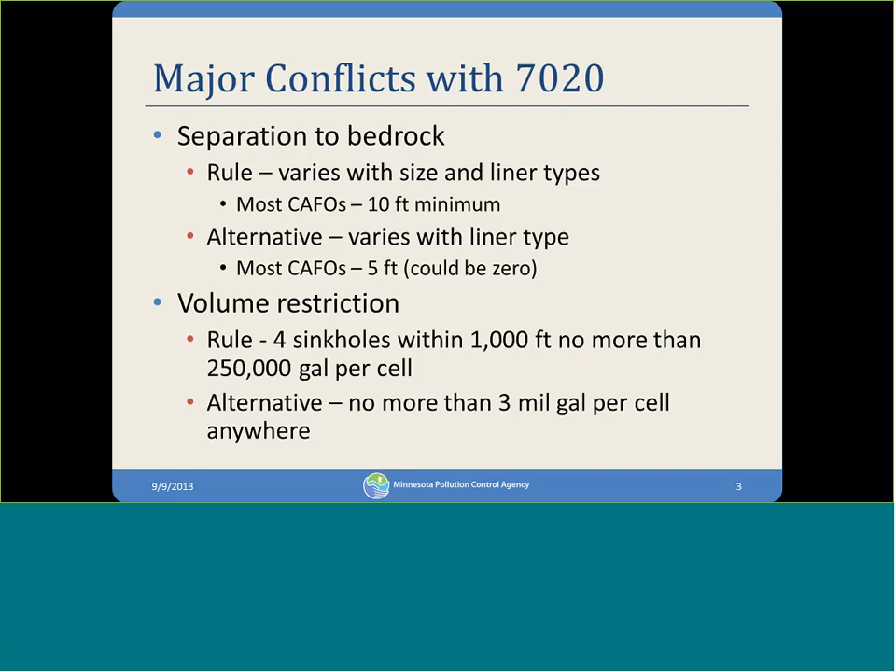So up until this point, how have we implemented the alternative standards? Well, like I said, this is the first time MPCA has been asked to act on them specifically, but I believe some counties have been asked to act on the alternative standards already. In 2001, in response to the work group standards, the MPCA commissioner at the time drafted a letter to the legislature saying that we can allow alternatives to our rules via the SDS permit, provided the alternatives provide equivalent protection of the environment.

So what we interpreted that to mean is staff assumed that the alternative standards could be allowed through an SDS permit, and in some cases even without a permit, if they're equivalent to the rule. In our rule revision process we're undergoing right now, we thought about cleaning up the rule, and this discussion came up with one of the Attorney General's office staff about these alternative standards and their reservation with us implementing the alternative standards that were not in rule.

And this SONAR says that you cannot vary things like setback distances, shoreland, floodplain, proximity to sinkholes, and separation distance to bedrock via the SDS permit. So it's very clear that, no, we can't implement the alternative standard fully when there's a major conflict with some locational restrictions. And two of the big ones here were proximity to sinkholes and separation distance to bedrock.

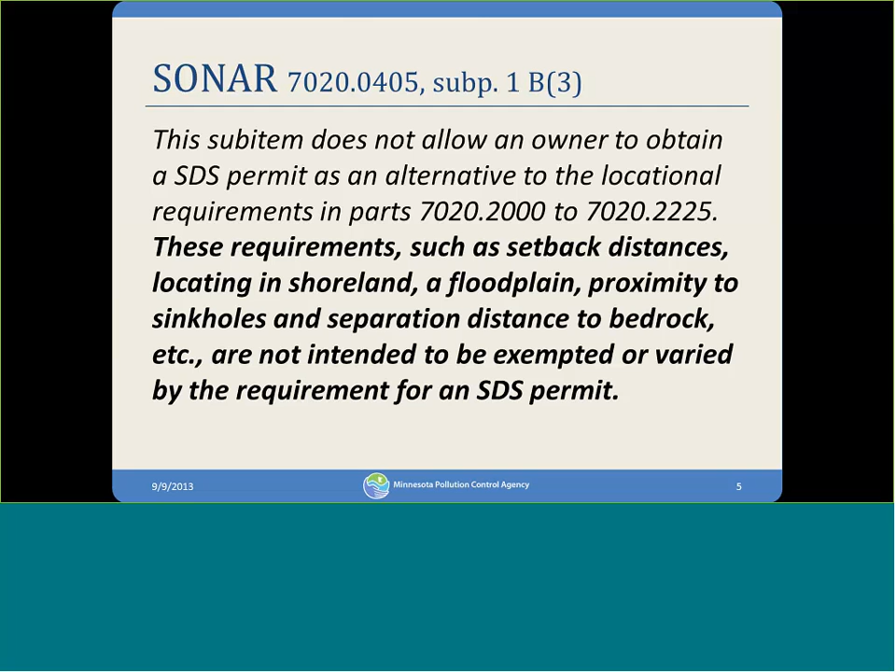So what does that mean from now and into the future? So if a project that's out there wants to deviate from the locational restrictions of Minnesota Rule 7020 by following the alternative standards, again, we're looking at volume restriction and bedrock separation, a variance from the feedlot rules is required. Now, this is not a variance acted on by county boards or anything. It's to be acted on by the MPCA.

So what that means is if a county would get a proposal to apply the alternative standards and they want to deviate from the rule requirements, it would have to be forwarded onto the MPCA for processing. Now, with the variance, there's quite a large fee for even applying for a variance. The fee would be in excess of $10,000 just to apply, with no guarantee it's going to be granted, and of course it's non-refundable.

The variance process is pretty arduous. It's pretty tough to get a variance from the feedlot rules. I don't think we've ever granted one. I think we may have one official application way back when. The variance can be granted on two grounds. One is it's not technologically feasible to comply with the rule, or the second would be it's too costly to comply with the rule. Now, the first one, not technologically feasible, would have to be there's no way to engineer a structure to work in that location.

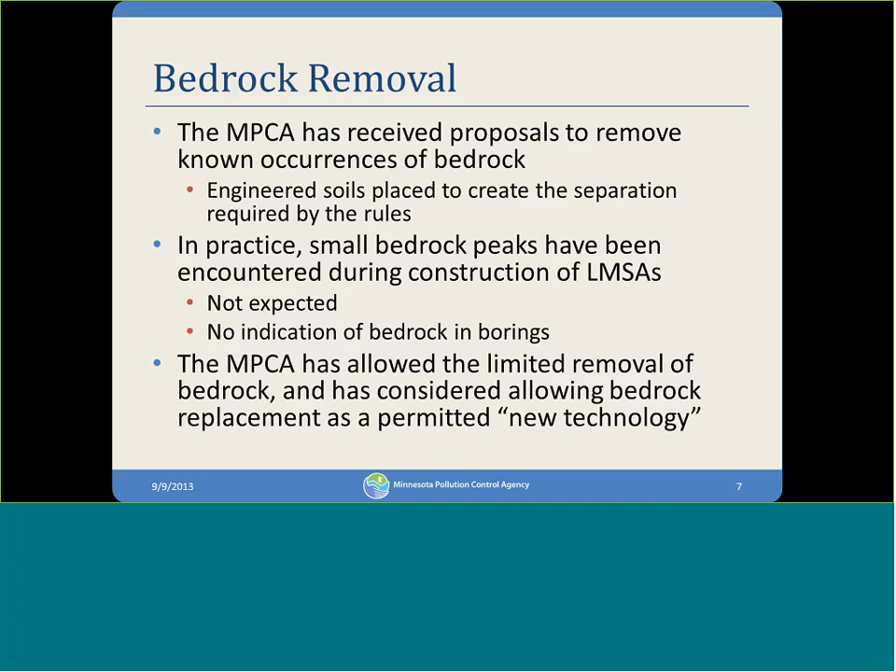So what we've proposed is to continue to allow limited removal of bedrock, kind of the unexpected occurrences, or if it's a small area they want to take out. And then extensive removal of bedrock would be done by a permit underneath a new technology provision of 7020, so you'd need an SDS permit. You may ask what bedrock removal looks like. Most of you have seen some of these pictures.

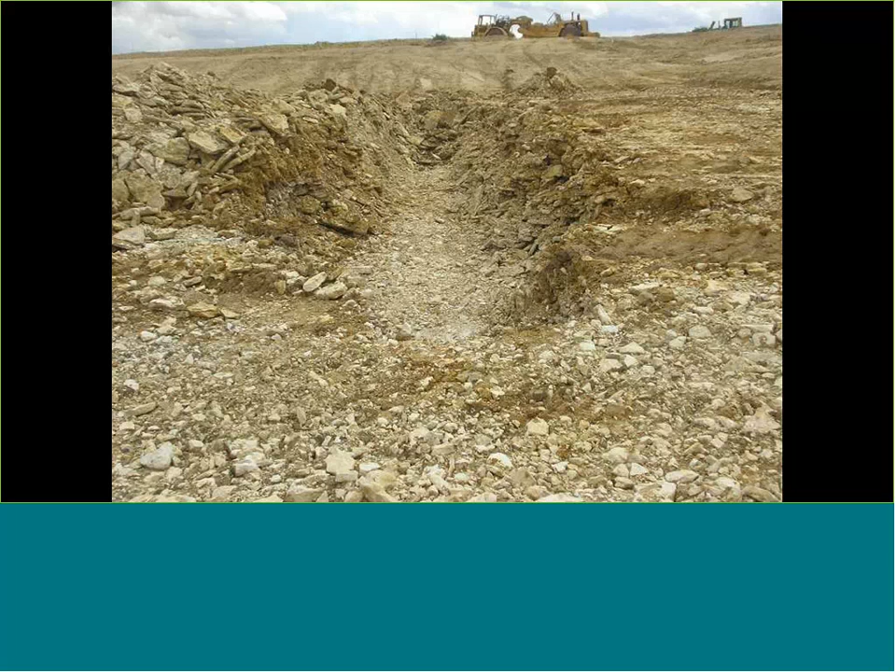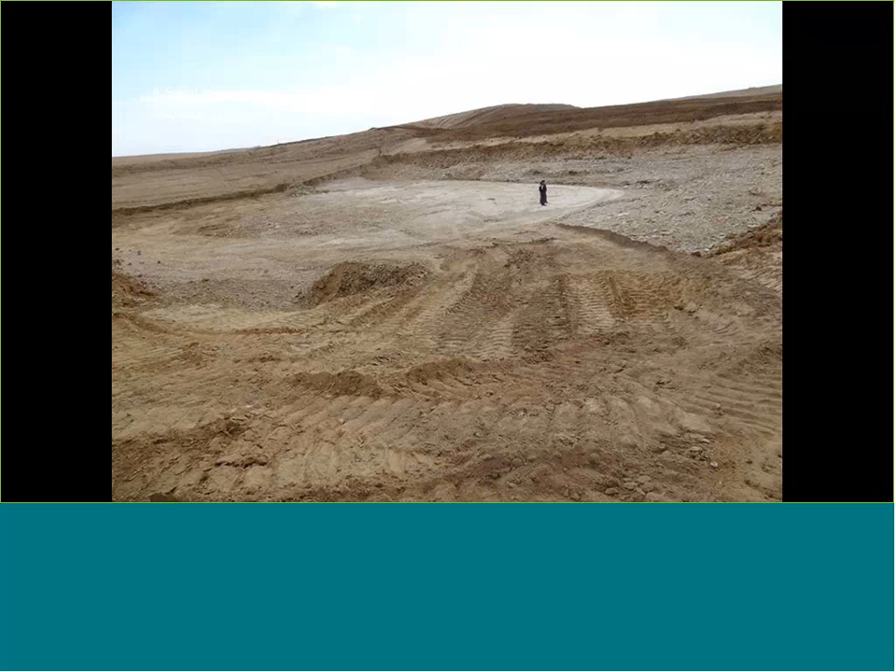So this is the idea, take out this rock they encounter, remove it with a simple excavator, peel it up. Some of it comes up pretty easily. And this is kind of what it looks like when you got the rock out of there. You can see the right side of the photo. The upper right corner is where all the rocks have been removed. They got a nice spot they swept off real nice that the people are standing on. And then towards the left, they kind of run on the rock.

That's what bedrock removal would look like. So our current rule, we believe the intent of that current rule was to establish a separation distance to the bedrock from liquid storage areas and leave it alone. Don't mess with the bedrock. Even though there's no specific mention of bedrock removal, we believe the current rule prohibits removal of bedrock.

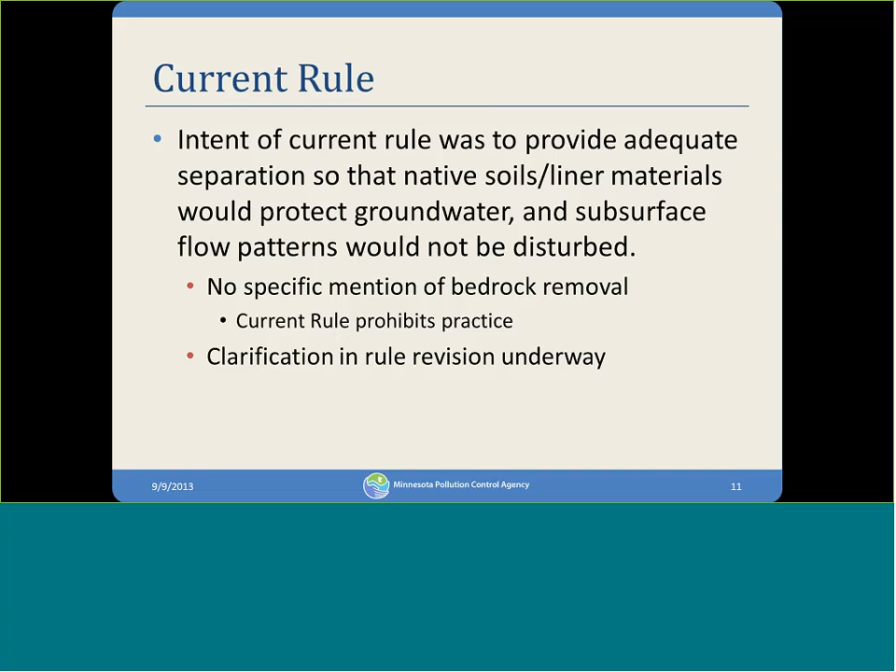So in our revision process, we are looking at clarifying the intent of the rule. So like I talked about before, we realize there's going to be situations where you run into it during construction, or there's going to be a case where it comes up in one little corner of the basin. And in those situations, I don't believe there's much concern with removing some of that bedrock. Now, there is no magic number I can give you that says if it's less than 10% of the basin area, go ahead and take it out. We're going to kind of handle it on a case-by-case basis.

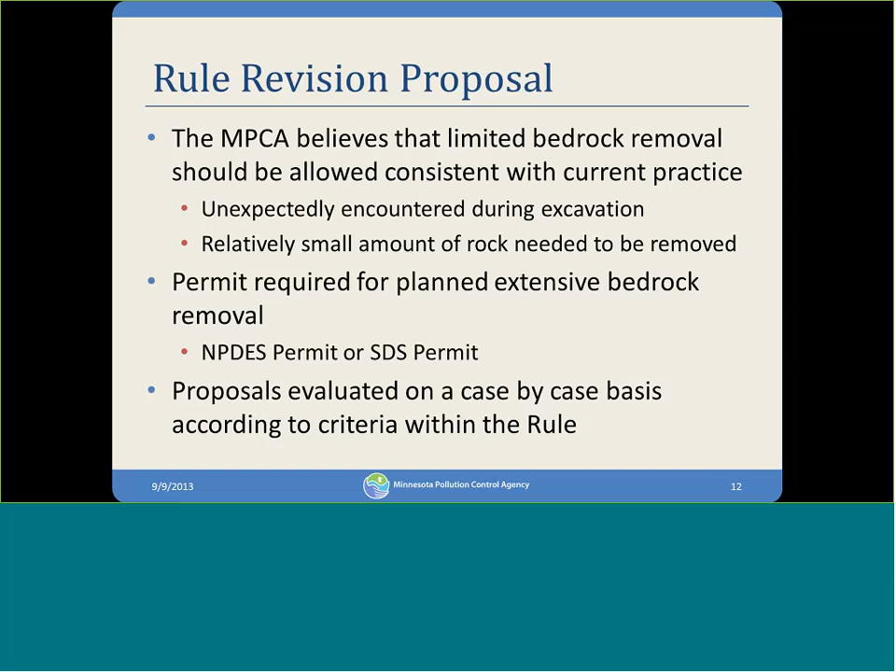And if somebody wants to take out a large amount of rock, so they want to take out 5 feet of rock across the entire footprint of the basin, that's something that needs to come to the MPCA and be evaluated extensively and most likely require an SDS permit to allow that. Now, the rule revision process does have some criteria in it that we're going to evaluate these proposals under. So there are 6 criteria that are going to be proposed for the rule, which will hopefully be finalized in the near future. And here they are.

So we look at the geologic sensitivity of the proposed location, the type and extent of bedrock to be removed, length of time the manure or other waste is stored or processed, how likely discharge to waters is given the design standards proposed, and looking at the volume that would be stored there. Type of material proposed to be stored and its pollutant concentration. So we look at, is it strong waste, liquid manure waste, or is it maybe runoff from a feed storage area that would be lower concentration?

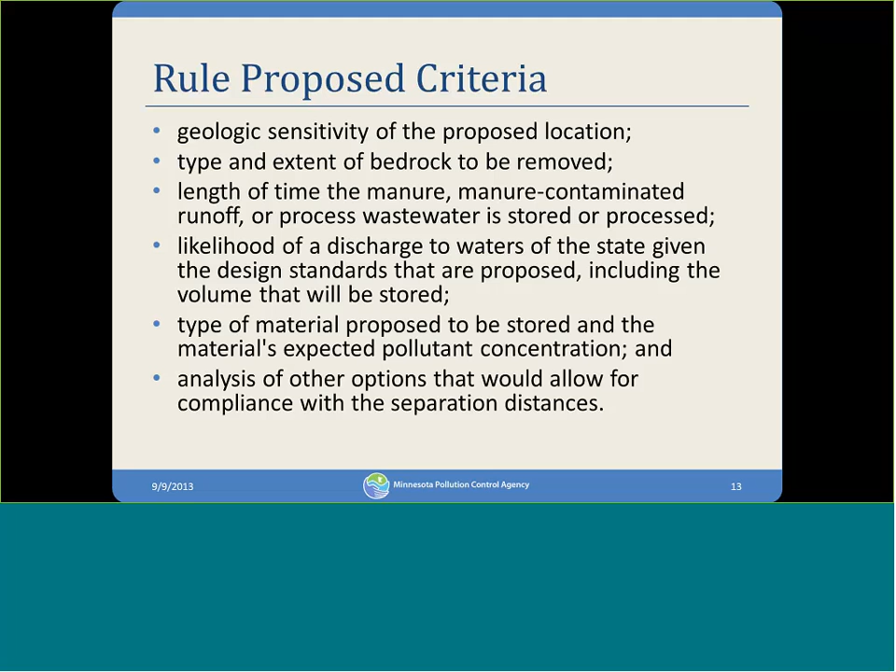And then we'd ask what other options have you considered that would allow compliance with the separation distance to bedrock? Is it as simple as sliding it 50, 80 feet one direction, or making the footprint a little larger so the bottom can come up? Things like that. So what might something like this look like? Like I said, we believe that you can allow this practice to continue for limited removal. So this might be a corner of a basin where you hit the rock a little bit in the corner and you take out maybe the top foot of really weathered bedrock. That, we believe, is an acceptable practice.

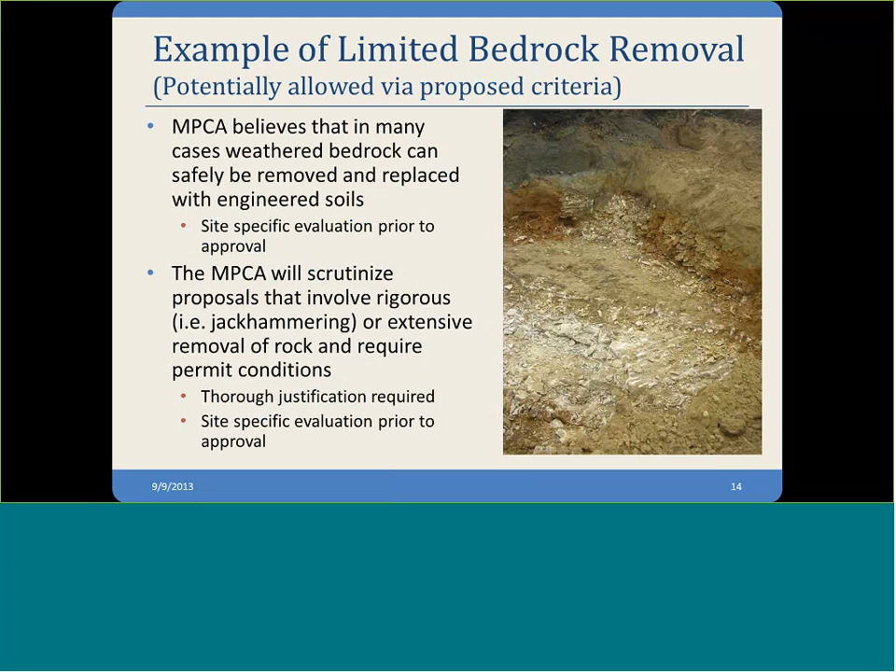Now, if they want to do that across the entire footprint of the basin, well, there may be some other issues that we want to look at. Or if they want to take out a large amount with, let's say, jackhammers or breaker bars or even dynamite in some cases, that would require some extensive permit conditions and a thorough evaluation by the MPCA.

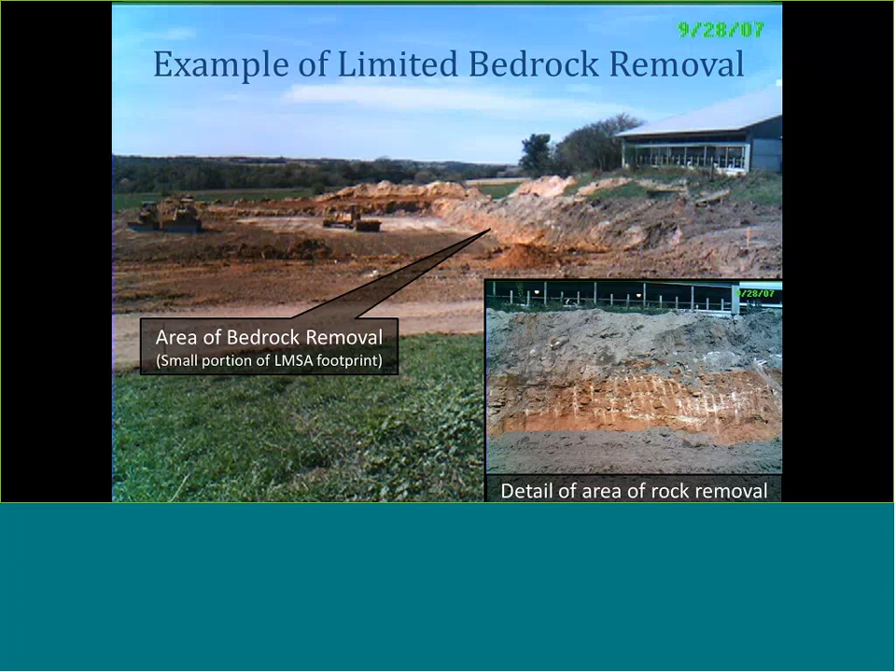This picture came from Winona County from Mark Gurnis. This might be something that we would consider even in the future, hopefully allowing CFOs to approve without talking to MPCA, but as of right now, it's kind of a case-by-case situation. You can see here they ran into a little rock in the corner of the basin and took out a couple feet just in that one corner, kind of digging into the hillside. This would be a good example of limited bedrock removal.

So what does this mean for CFOs and plan approval? As of right now, until the rule is finalized, any removal of bedrock needs MPCA approval. So if you got somebody that's planning to take out rock as part of a project, make sure you forward those plans and specs over to the MPCA. And if they run into it during construction, give us a phone call so we can come out and take a look at it. I'm more than willing to drive to the Rochester area and check out rock removal.

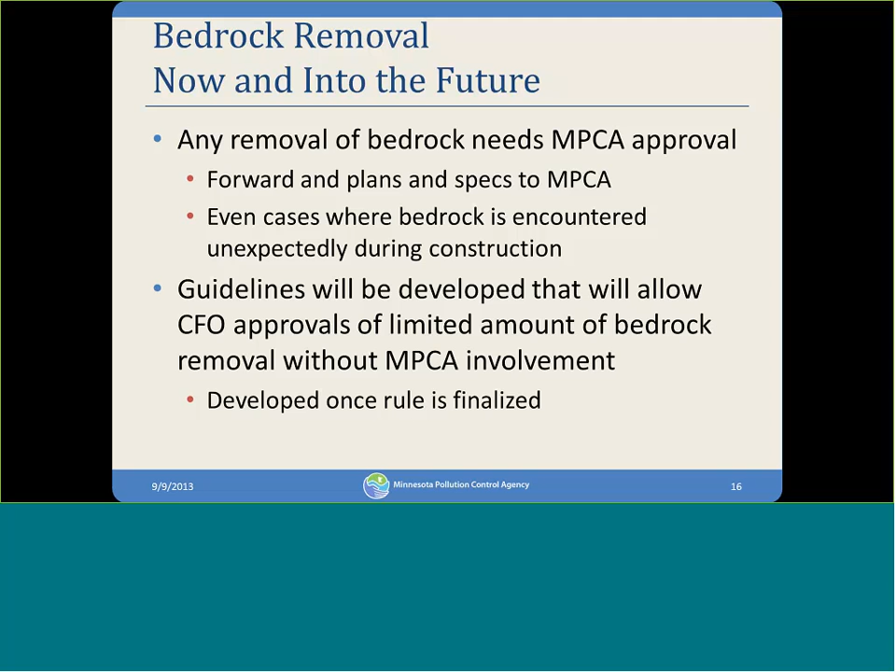Hopefully in the future, once the rules are finalized, we're going to develop some guidelines that would allow CFOs to approve limited amounts of removal of bedrock without having to call us each time. So we come up with some criteria. They have to meet A, B, C, maybe D criteria before you could approve it. But like I said, as of right now, it's coming to the MPCA regardless.

So what's the takeaway message from this? If you want to implement the alternative standard and vary locational restrictions, you need a variance from the rules, and that needs to come to the MPCA for review. If you're looking at bedrock removal, as of today, that needs to come and have MPCA approval as well. Hopefully in the future we'll get some guidelines developed once the rules are finalized that will allow CFOs to go ahead and make that approval without talking to us.

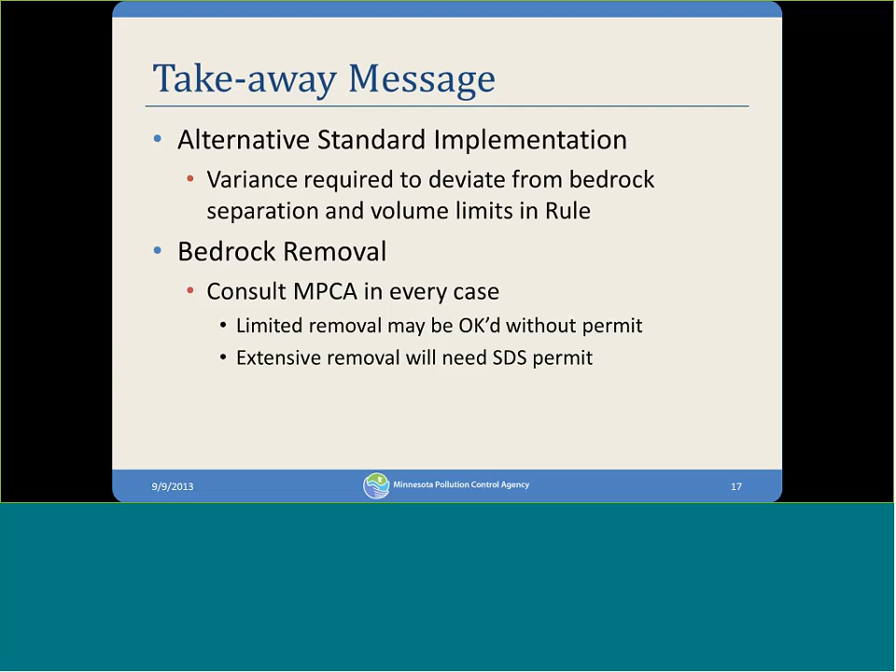Hey, George, are there any other places in the state where there might be that proximity to bedrock, other than, I mean, I know it's most common in the southeast. We have a little bit of it in Pine County, which is an undelegated county. Are there any other places where they might encounter that?

No. You may encounter bedrock in the southwest part of the state, say like Rock County. We have a couple proposals to build right on top of bedrock down there. The only bedrock that's protected in the rule is that's susceptible to karst formation. So it includes certain sandstones and your limestone bedrock. So it's going to be southeast, and there's a little pocket of it in Pine County as well in sandstone.

Okay. We had a question come in on chat from Doug. He said, what separation distance will be required on the approved removal of limited bedrock? It'd be the same that's in the rule. So let's say they do some test pits and they want to put the basin in, and the proposal is to take out 5 feet of rock to make a 5-foot separation distance. They can take out 5 feet, 6 feet. An engineer and an excavator will tell you to take out as much as they want. Just can they afford to take it out?